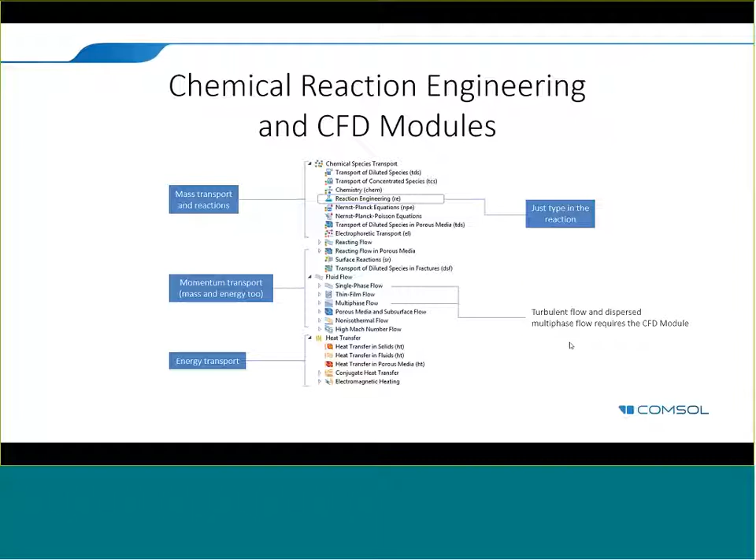In the heat transfer interfaces, which are the energy transport equations, you can combine heat transfer in fluids and also heat transfer in solids. For conjugate heat transfer, if you want to model, for example, a metal heater in combination with fluid flow, you can combine that. Specifically, you can have surface-to-surface radiation, which requires the heat transfer module. But for radiation surface to ambient, that is actually included in the reaction engineering module and in the CFD module.

So if we go back to our flowchart and look at the space-independent models, typically this would be a model of a lab-scale reactor where you have full control of mixing, so you know you have a perfectly mixed system. The only variations you have are in time, so you might have composition and temperature variations in time, but the distribution of temperature and composition is fairly uniform in space.

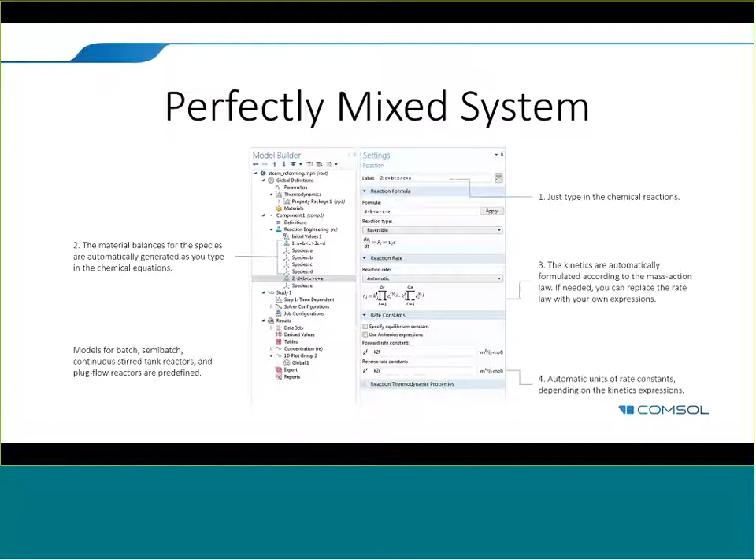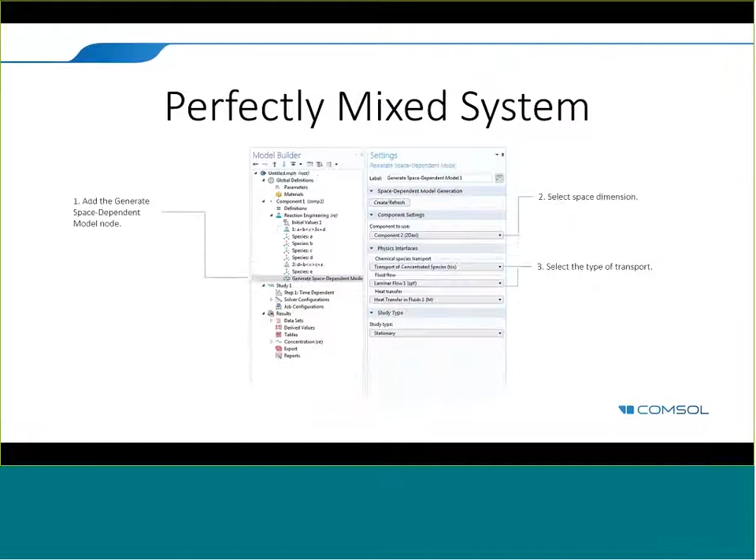For that type of model setup, we have in COMSOL the reaction engineering interface, where you just type in the chemical equations, and the material and energy balances are automatically defined and set up under the hood. Then, to go to the next step in the chart to model a space-dependent model, you have a generate space-dependent model node, where you can select to set up a model in 1D, 2D, 2D axisymmetric, and 3D with chemical species transport, fluid flow, and heat transfer. I'm going to quickly show you how that looks in the graphical user interface.

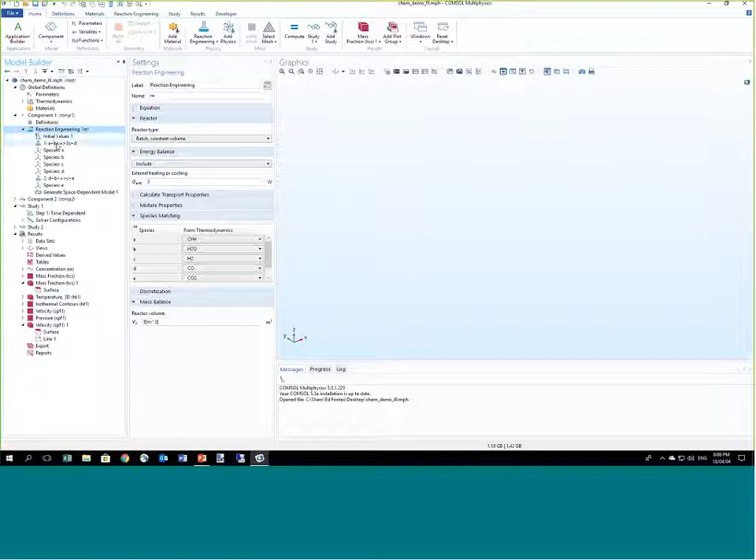So typically you could start with a reaction engineering interface, and in the reaction engineering interface you can add reactions by just clicking the reaction button. Once you click that, you can just type in the chemical equation right in the user interface. You can also type in chemical formulas like CH4, or use a generic form like A plus B gives 3C plus D, like in this example.

The rate expressions are automatically defined here, set up using the mass action law. But you can manually change this completely. For example, if you want to remove the reverse reaction, you can just select the reverse expression and just have the forward reaction rate.

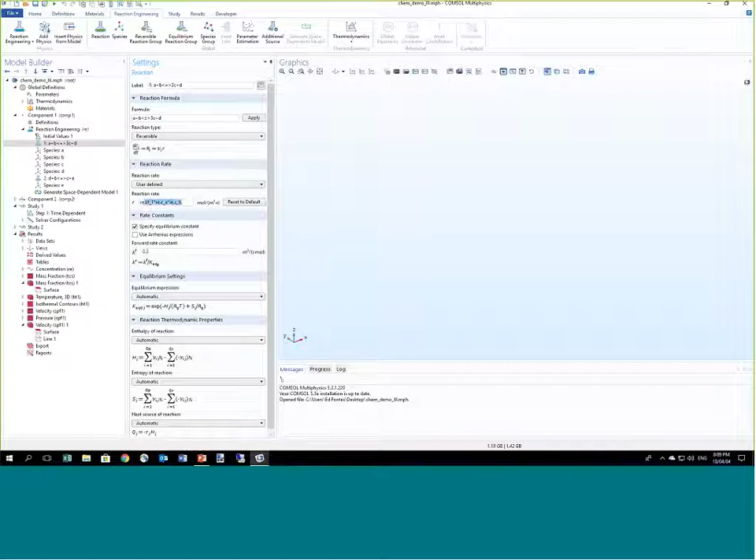You can add a second reaction like in this case, and you can also generate a space-dependent model by clicking this button. In this case, I have generated a 2D axisymmetric model of a tubular reactor. Once I click create the space-dependent model, the transport of concentrated species, laminar flow, and heat transfer in fluids interfaces are set up here automatically.

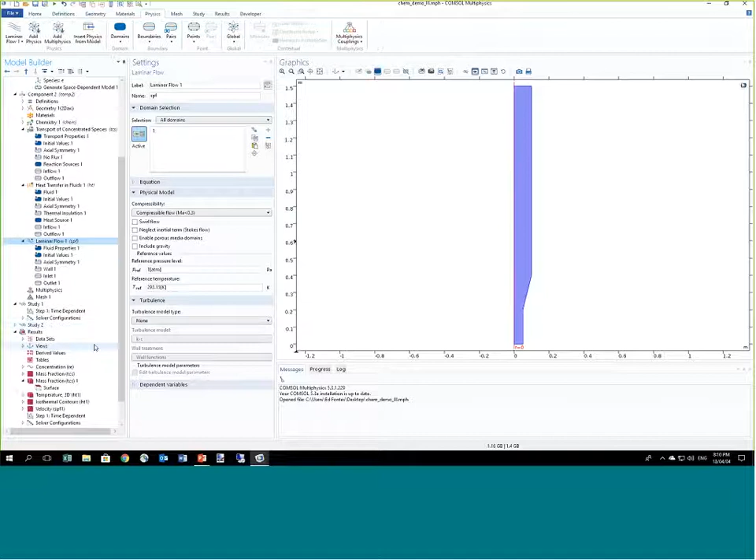Of course, I have to draw a geometry. Once I solve the problem, for example the time-dependent problem for the 0D case, then the stationary problem for the 2D axisymmetric model, I can get the composition, the velocity field, and so on in this very simple and straightforward tubular reactor.

So using that strategy, you can very easily set up any type of model, including for non-ideal reactors, with both very complex chemical kinetics and also very complex transport processes.

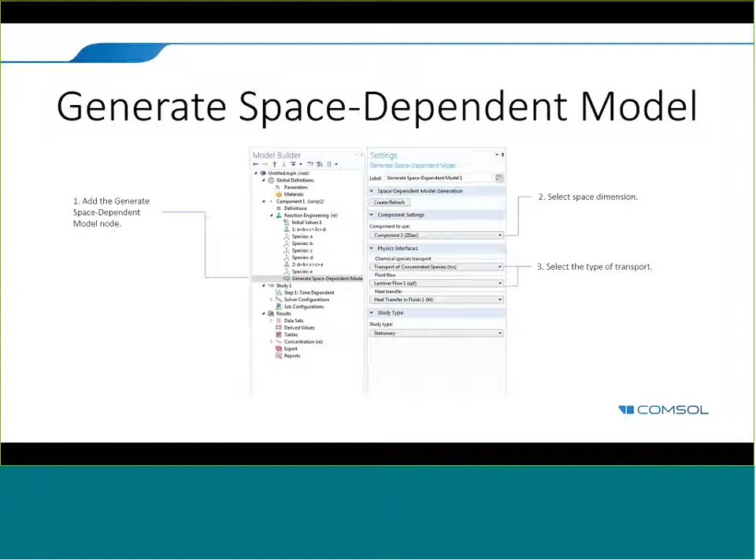One thing that I didn't show you here is that since this latest version, we also have a thermodynamic property database in COMSOL in order to generate properties for liquids and gases such as heat capacity, thermal conductivity, binary diffusivities on mixture, and also to compute things like the composition of gases and liquids at equilibrium, so-called flash calculations. Density, viscosity, of course, and those properties that can be very hard to compute.

They're actually not difficult, it's just a lot of work to compute. So you have a bunch of different thermodynamic models for liquids and gases, so that you avoid that sheer physical work that is involved in computing thermodynamic properties.

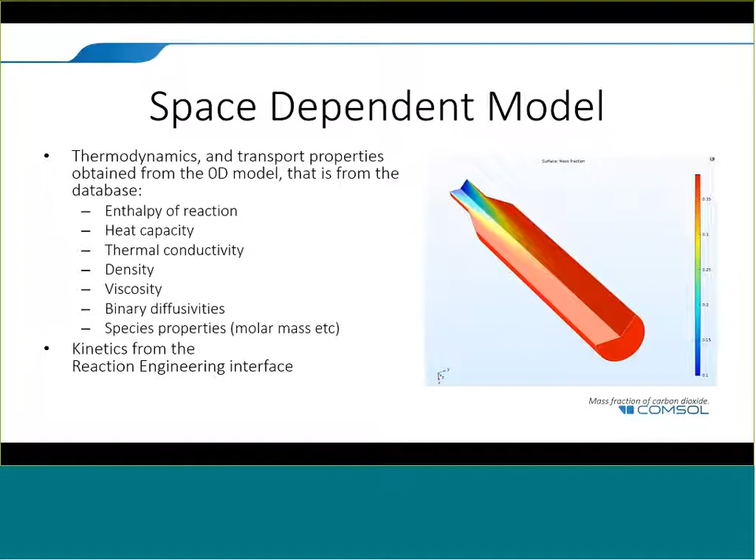So the rest of the presentation will actually be about tank reactors that are continuously stirred. They can be continuous, but they can also be batch reactors. So in this example, a heated reactor, heated with two vertical pipes, with a bottom impeller, with a free surface also, a model using rotating machinery and with a free surface.

In order to set up this type of problem in COMSOL, we have a number of ready-made interfaces, fluid flow interfaces and reacting flow interfaces for rotating machinery. There are several approaches you can use: the frozen rotor approach, and like in this case, the sliding mesh approach.

In the frozen rotor approach, the impeller doesn't really move. You have a velocity at the blade of the impellers, but it's frozen in time. So it's a kind of pseudo steady state approach, which gives you a very good estimate of the flow distribution and the amount of mixing in a system.

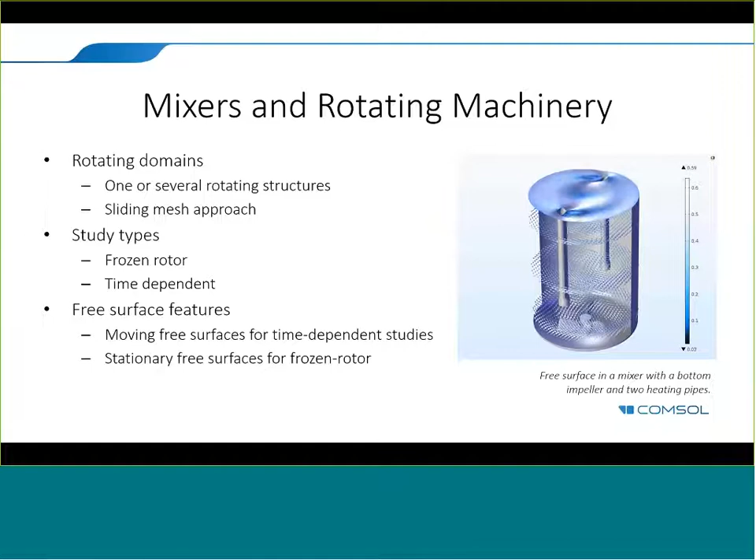And I'll show you this later.

So there are a couple of things you need to do in order to model rotating machinery or mixers, like in this case, or stirred tank reactors, using a moving mesh, a sliding mesh. And that's one of the things you have to start with, is to use assembly conditions for the geometry. What does that mean?

Basically, the core of the fluid, where the impeller is, that surrounds the impeller, has to be a cylinder in COMSOL. On that cylinder you tell COMSOL that it is one part in an assembly, and everything outside of that cylinder is another part of the assembly.

That allows, on the faces between this inner cylinder and the outer fluid outside of that hypothetical cylinder, the mesh over those internal surfaces to not coincide. That means the elements do not have to share faces when you create the mesh. They can actually slide over each other, and the solution will be projected from one side to the other through interpolation.

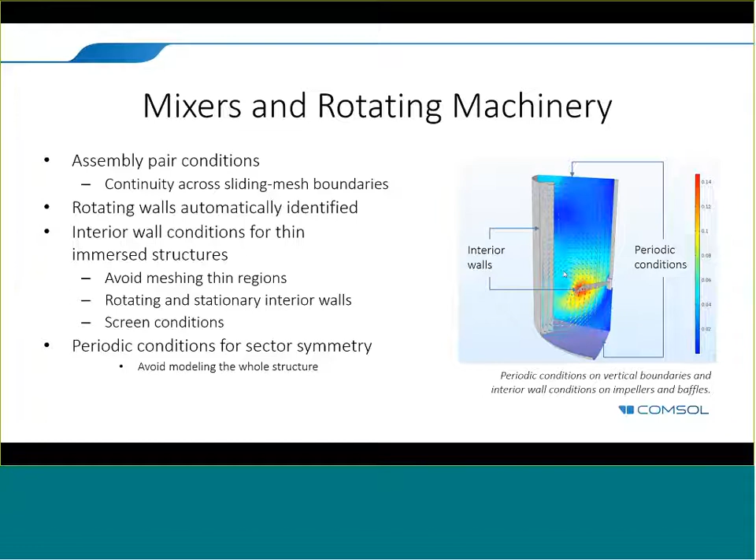And since the impeller here is frozen in time, you just apply a velocity at the surface of the impeller blades. That means you can assume periodicity on the vertical internal boundaries, the symmetry, periodic conditions, where those conditions are applied. That makes it possible to get very good estimates with comparably very small computational effort, since the problem is only one-eighth of the original problem.

So I'll show you a short demo of a mixer here in this case, but showing how you set up a mixer problem, or a batch reactor problem, a tank reactor with a central impeller, and how that is set up in COMSOL for sliding mesh and for a full time-dependent computation.

So let's start with the first step. What we need to define in definitions, this is actually new for version 5.3a, is that in definitions you have a component, a three-dimensional component. You can see that on the icon, which is a cube.

If it's a two-dimensional model, it's just a square. Now, in the definitions, we have now centralized all the moving mesh. That means that whatever physics interface you add to this model, it will obey the moving mesh. It will actually be able to generate the equations for a moving mesh.

So if I had manually added heat transfer and chemical species balances and so on, they would all automatically get the rotating domain. In the past, you had to tell each physics interface where the rotating domain was. Now it's all centralized, so it makes it possible to set up a multiphysics problem with one moving mesh feature, which is the one in the definitions.

So here, the only thing I need to do is tell COMSOL which one is the rotating domain. Now, the rotating domain here in blue is one of the two parts in the assembly, and the other part of the assembly is what's outside of the rotating domain, shown here in red.

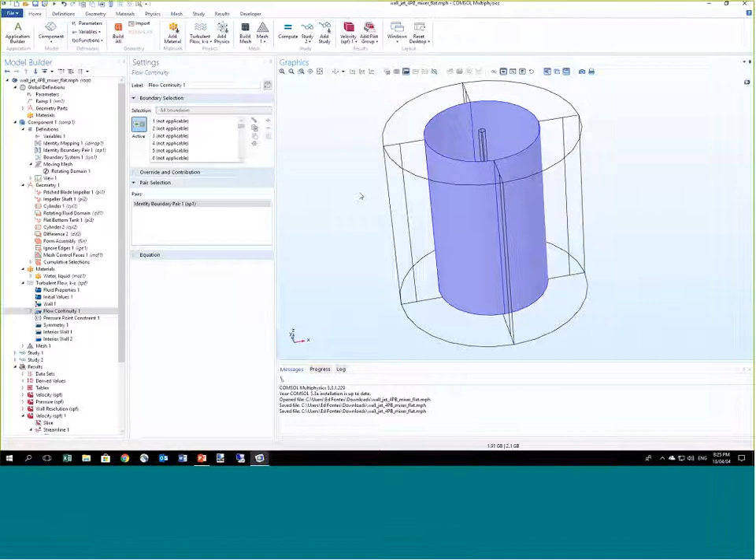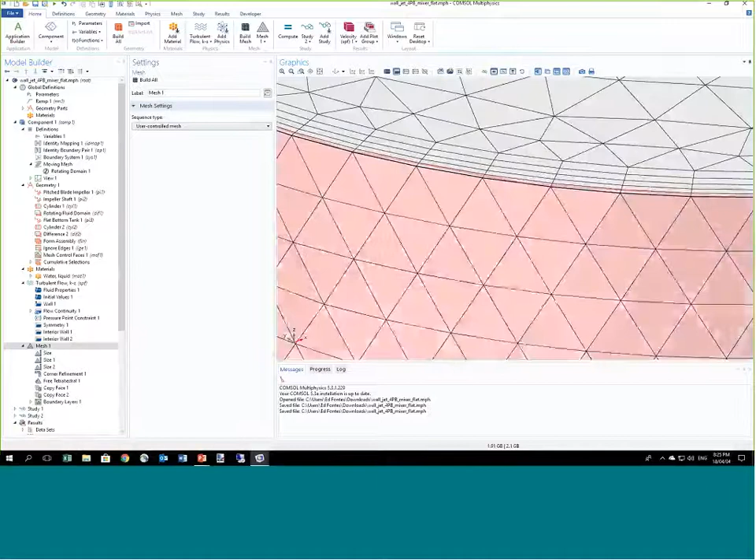The mesh is then automatically generated, and if you look closely, since it's a fluid flow and transport problem, it will automatically use a so-called boundary layer mesh, so that it will resolve the flow at the walls a little bit better. And once we solve the problem, we get the fluid flow, and we can also generate an animation from this. No, it didn't take that much, so we can repeat that.

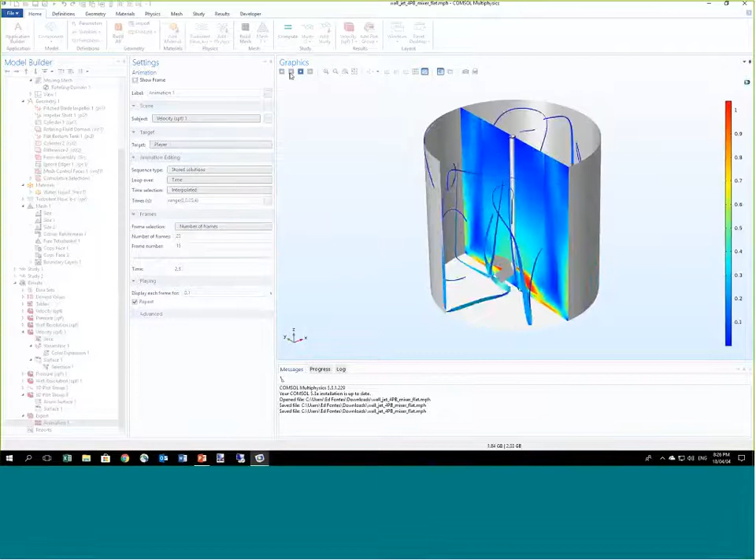And so here we see the impellers. I should have had more time steps here to really see the rotation of the impellers. And here you can see qualitatively how the fluid flow distribution looks. This impeller actually works like it should. It's a so-called axial impeller. So by its angle, it should generate an upwards and downwards rotating flow to obtain optimal mixing.

This is actually a benchmark model. It reproduces the fluid flow reported in a paper in the scientific literature, and is used to verify that we're actually solving the equations correctly here. In this case, we're using the standard k-epsilon model for solving this type of problem in COMSOL. So it's the k-epsilon model for rotating machinery that is used here by default.

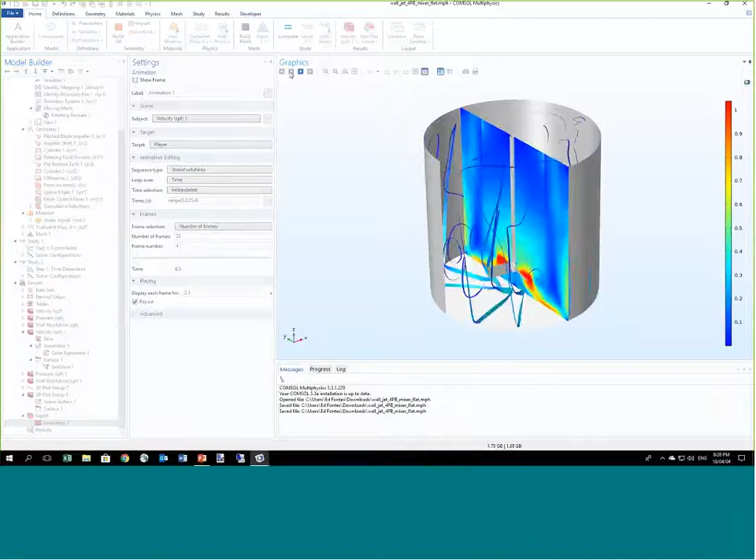So another thing that I want to mention is that now we saw here the time-dependent flow, and if we look closely, it already started with some kind of developed flow. We didn't have to wait until the flow was developed, and the reason for that is that we combined two studies. In the first study, we solved for a frozen rotor, so that the impeller in the middle doesn't really move. We just apply a velocity on the blades. Well, COMSOL does. We don't have to bother about it. We just select the static frozen rotor, and everything is done automatically for us.

But what that gives you is a very good initial condition if you're interested in the harmonic steady state. It's not a real steady state, but a harmonic steady state that you obtain once the impeller actually rotates. So you get a very nice initial condition for the full time-dependent simulation here that goes over 4 seconds. You will not see how the mixer or the reactor behaves at startup, but you will definitely see how the mixer behaves once it has reached the operational speed.

And so you see the amount of mixing, the concentration distribution that you could expect when you have reached the best possible mixing with this system. And so you will be able to see if you get uniform product quality or not. In this case, I guess the mixing is actually not very good. So what you would probably have to do is insert another impeller a little bit up on the shaft, maybe in the middle, with some shift in the position, in order to get improved mixing at the top of the mixer or the reactor in this case.

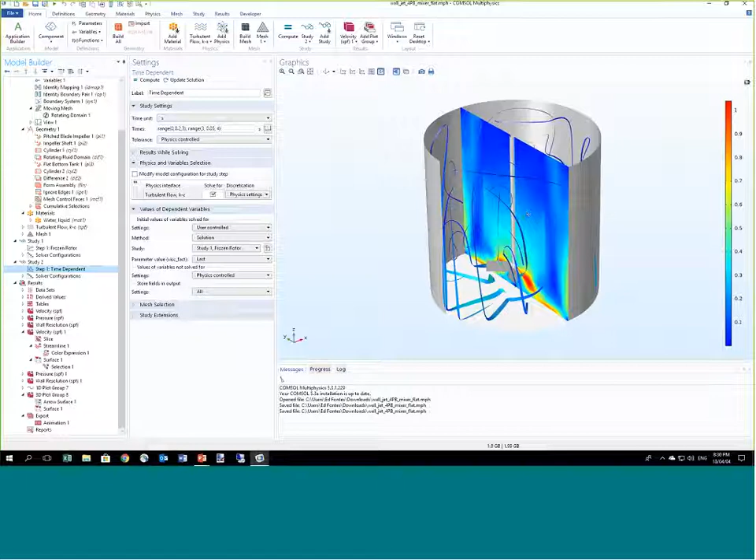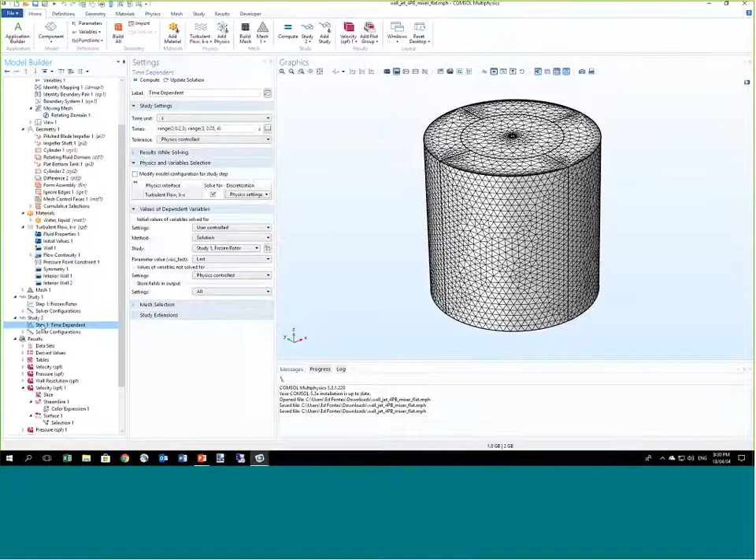So to repeat again, first the geometry with form assembly. Form assembly separates the inner cylinder from the outer stationary part of the mixer. Secondly, define which part is the rotating domain, and then tell COMSOL that you have continuity over these boundaries between the inner and outer domain. Set up the mesh, set up an initial solution with the frozen rotor, and then use that as an input to the time-dependent solver for the fully time-dependent solution of the problem.

And then plot the solution, of course, and a movie doesn't say that much. It's just nice to see, and maybe some qualitative results and understanding you can get out of the movie. But eventually, what you do is you plot XY plots comparing some entity like the velocity norm along, for example, in this case, the radius, and the viscosity, and you compare to experimental data and data reported by other people that have solved the same problem.

So what are the typical customers that we have for this type of problem? The typical customers for batch reactors and stirred tank reactors are fine chemicals, pharmaceutical, consumer products such as soaps, shampoos, and toothpaste. Food processing is also an industry where you find this type of batch reactors or tank reactors that can be continuous.

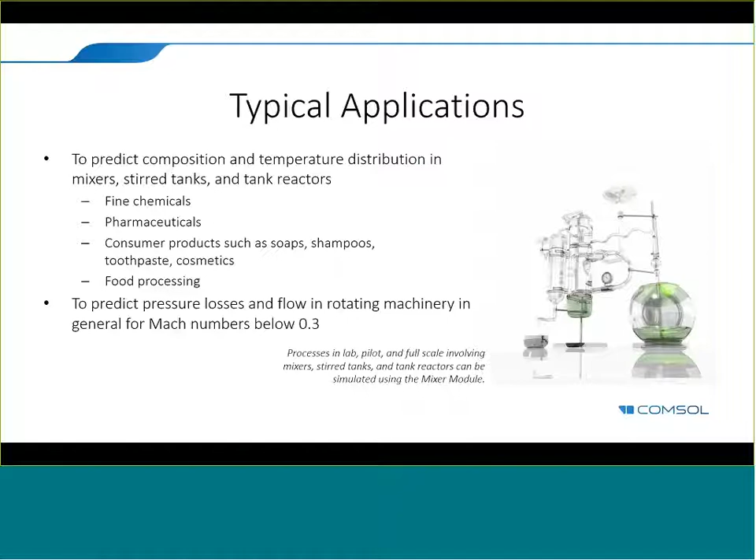And I already hinted that you have laminar and turbulent flows for rotating machinery. We have a bunch of different turbulence models, like algebraic turbulence models, transport equation turbulence models, and then ready-made functionality to deal with these rotating machineries. In the Mixer Module, we have a part library that I will show you also. And then we have so-called ready-made couplings for non-isothermal flows, reacting flows, and multiphase flows. So you can, right off the bat, set up a problem with rotating impellers and multiphase flow.

And then you have all the other multiphysics capabilities. For example, you can couple the model that you see here to the left with a structural mechanics computation to see the loads and the stresses and strains that you obtain on the impellers, and maybe also the deformations on the impeller blades, and also compute the torque that will be required to drive these impellers.

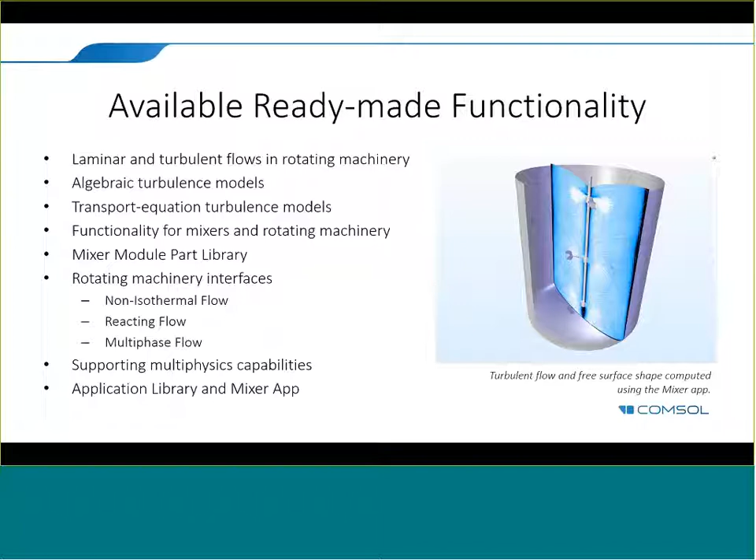And there are a bunch of application library examples and so-called apps. The one that I demoed is in the application library. So you can download this example and run the step-by-step instructions to set up and reproduce the results that I showed you.

If you look at the laminar flow capabilities, we have Newtonian and non-Newtonian fluids, and we use the Carreau-Yasuda model. But you can also type in any expression of the shear stress for your non-Newtonian models. We're also developing viscoelastic flow models for the next release. There's an example already now in the application library, but we will develop ready-made fluid flow interfaces for that.

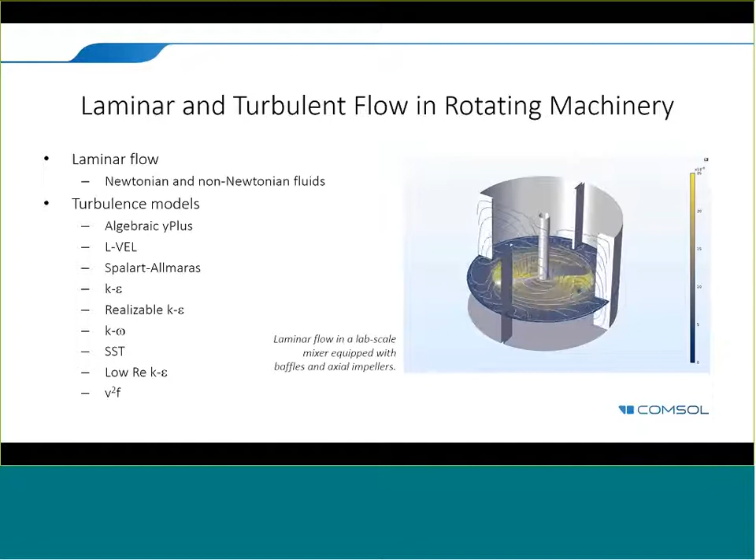The turbulence models, like I mentioned, algebraic models, and then transport models like Spalart-Allmaras, k-epsilon, realizable k-epsilon, k-omega, etc. And I will walk you through those very quickly. So the algebraic models, like the y-plus and the LVEL, are very inexpensive computationally.

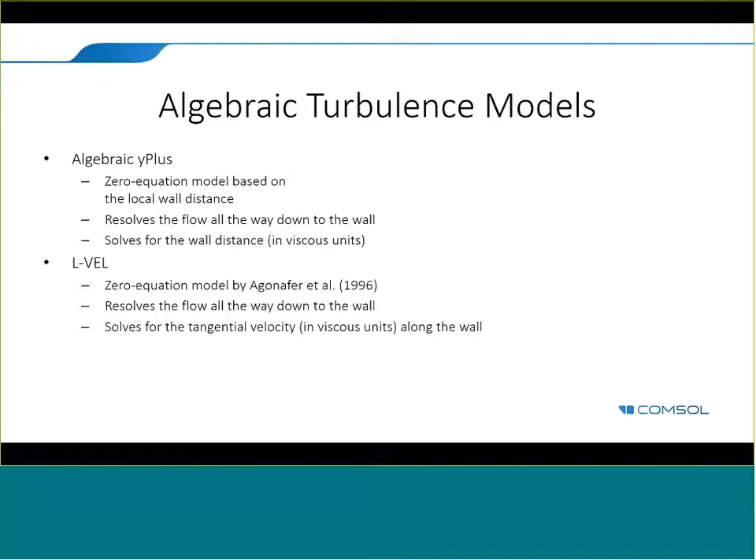They actually don't solve any transport equations for turbulence, and that's also the drawback. They're not very accurate for problems where the transported turbulence has a big impact. But those are models that are very popular when you have fluid flow and heat transfer, and you want to have a good estimate of the energy consumption of a system, for example, and the temperature, and have a graph of the temperature distribution for quality control, etc. And these are used a lot, for example, in electronics cooling, but also for mixers coupled to heat transfer.

Then you have the workhorse, which is the K-epsilon model, and the reason why it's the workhorse is that it gives you relatively good accuracy for a relatively small computational cost. And so the one included in COMSOL also has realizability constraints, which increases accuracy. So it limits the amount of turbulence that can be generated in one point. There's also a more complex realizable K-epsilon model, which models the realizability in the coefficients. So that's slightly more computationally expensive and also slightly more accurate.

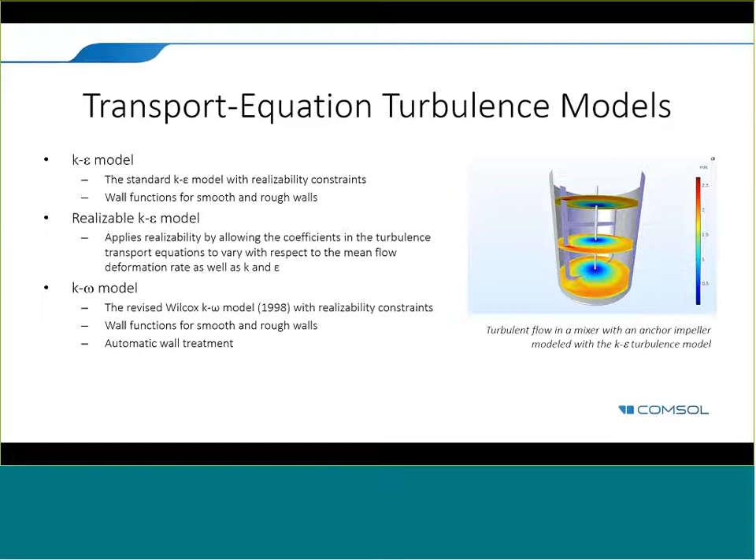The K-omega model implemented in COMSOL is the revised Wilcox K-omega, and it uses wall functions for smooth and rough walls, but it also has automatic wall treatment, which means that if you have a boundary layer mesh, like I showed you, that resolves the boundary layer close enough, then it will automatically use a low Reynolds turbulence model that goes all the way down to the wall. Needless to say, that's more computationally expensive, but if you have the required mesh resolution, it's also more accurate, of course. SST is a combination of K-epsilon and K-omega. So it takes the best of both worlds, close to the wall and far away from the wall.

The low Reynolds K-epsilon turbulence model requires, of course, a mesh resolution, because it always solves the problem all the way down to the wall. And it doesn't assume a boundary layer where you set the conditions outside of the boundary layer. It goes all the way to where the velocity is zero.

The V2F turbulence model is a more complex and also more expensive model. What it does is actually treat the anisotropy of turbulence. So close to the wall, you get a different turbulence parallel to the wall compared to the direction perpendicular to the wall. And that is very common for curved surfaces. In that case, the V2F turbulence model, which is a 4-equation model, so basically K and epsilon and two more equations to model the anisotropy, is more expensive, but of course very accurate.

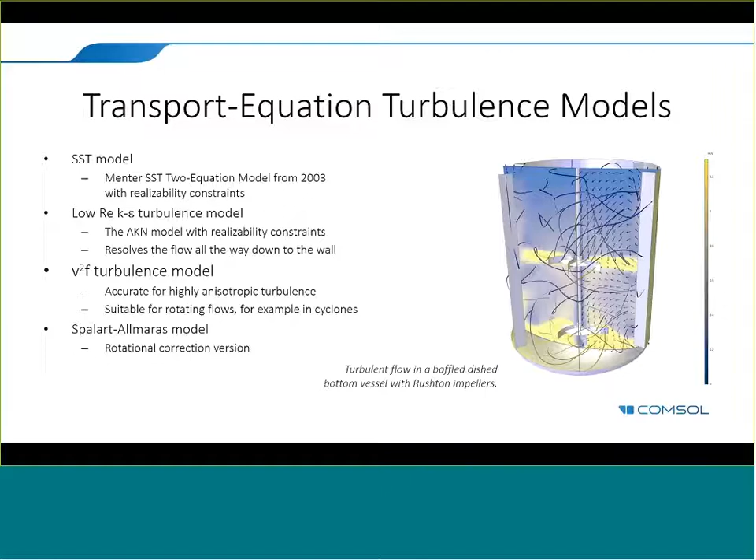Spalart-Allmaras is used for aerodynamics. So if you have turbulent flow, for example, in gases with impellers that look more like propellers or ventilators, then that's probably a decent and relatively inexpensive model to use. It's a 1-equation model. It's a low Reynolds model, so you have to go all the way to the wall. In that sense it's somewhat expensive, but other than that, it's relatively inexpensive, I would say.

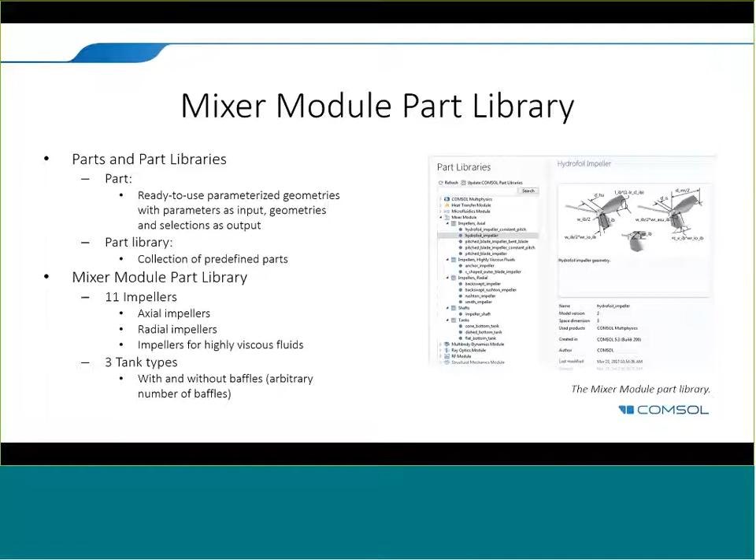Now, in the Mixer Module, you can set up a huge number of combinations of different impellers. There are axial impellers and radial impellers, and then some high viscous fluid impellers; both the axial and the radial impellers can be generated in many different combinations. So there are 11 impellers, but you can create everything from a propeller to an impeller using the fact that you can create fillets and chamfers, and you can also fold the impeller surfaces along a line by just telling the part library where you want to fold. So you can create these types of impellers.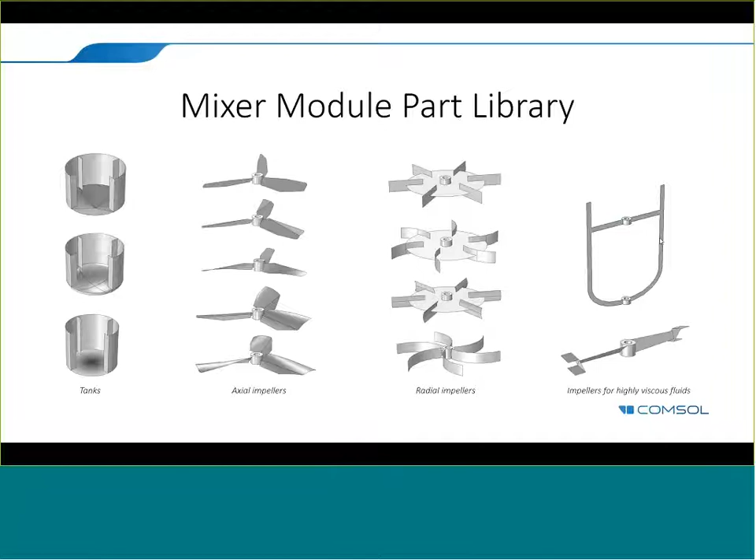For one axial impeller, you can create a huge number of different types. These are just a few. And then the radial impellers, of course, needless to say. The two impellers for highly viscous fluids are those. This is a standard impeller, an anchor impeller, and this is a typical impeller that you would use, for example, to mix paints and very highly viscous fluids. These types of impellers could also be used in the food processing industry.

And so using the Mixer Module, you have three basic parts: the impellers, the shaft, and the tanks. Different types of tanks with cone-shaped bottoms, with dish-formed bottoms, or you can also have just a flat bottom. And you can combine those by just loading these geometries from the geometry part library. You don't have to build them.

They're fully parameterized, so you can vary radius, length, and of course height and thickness of parts and so on. And you can also vary radius of fillets, position of chamfers, and position of folds. Like here, for example, you have a fold. That fold can be positioned wherever you want on the impeller itself.

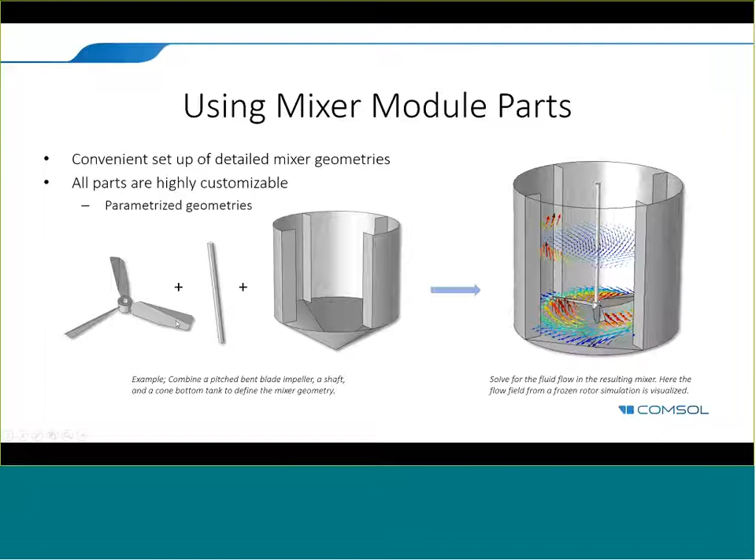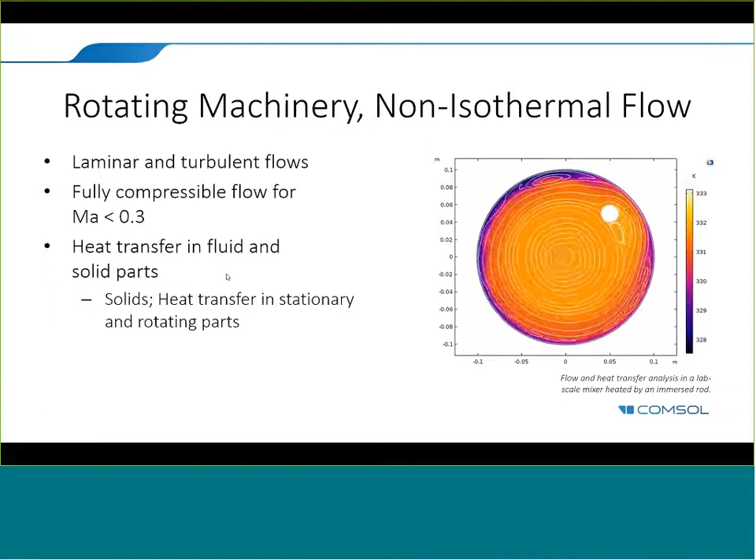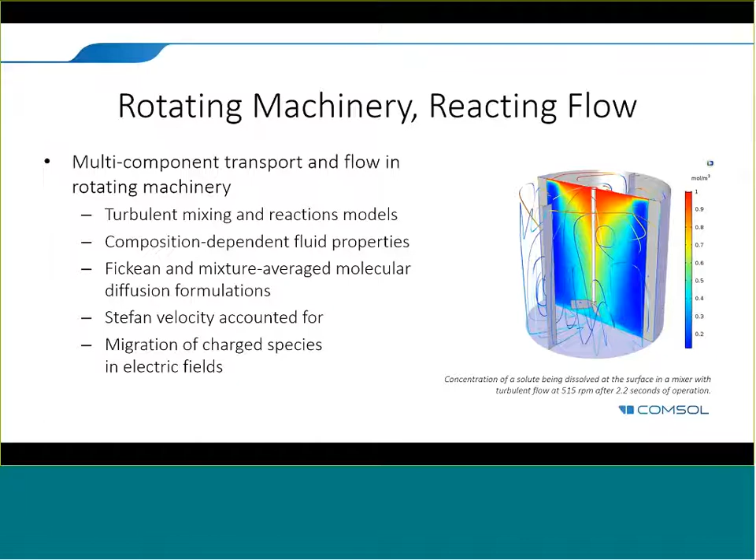And there are ready-made interfaces for reacting flow, both for laminar and turbulent multicomponent transport. For laminar, you can use very accurate models like the Maxwell-Stefan multicomponent transport models, and you can use the mixture-averaged model or just pure Fickian models for diluted solutions. And you can also have electrochemical problems with electric fields for migration of charged species, accounted for in the transport of chemical species, fully coupled to fluid flow and chemical reactions.

And since the last version, we also added mixture and bubbly flow as ready-made interfaces for rotating machinery, where you can model solid particles or liquid droplets in a fluid, or gas bubbles in a liquid, for example. And you can, of course, do this for laminar and turbulent flows.

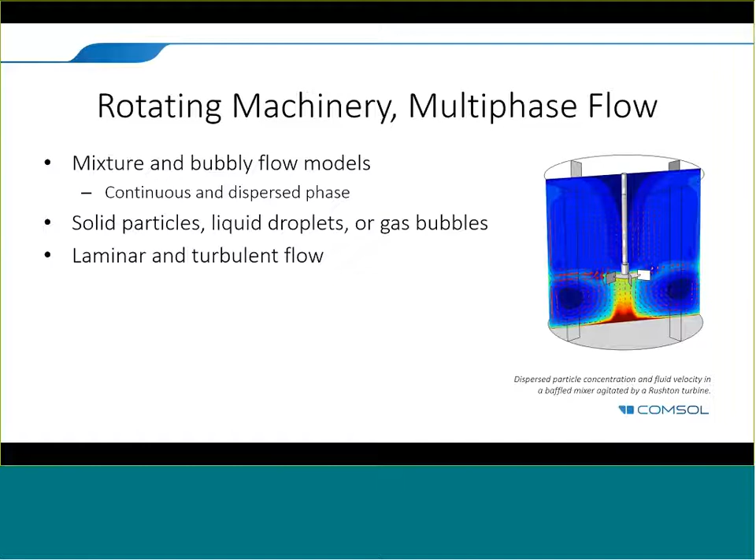I briefly mentioned fluid-structure interaction in order to compute things like torque or stress and strains on the impellers. The conjugate heat transfer I already showed you, and the reaction engineering, of course. That's needless to say. I wouldn't even call it a multiphysics coupling. It's just reacting flow, or just what you expect from a package for chemical engineering and transport phenomena, which is what we have here.

One thing that is nice to have is the Particle Tracing Module, because there you can do very complex multiphase flow using Euler-Lagrange models with two-way coupled two-phase flow, and also charged particles. Of course, you can only use that for a small amount of particles, but it's still a very inexpensive way of modeling two-phase flow.

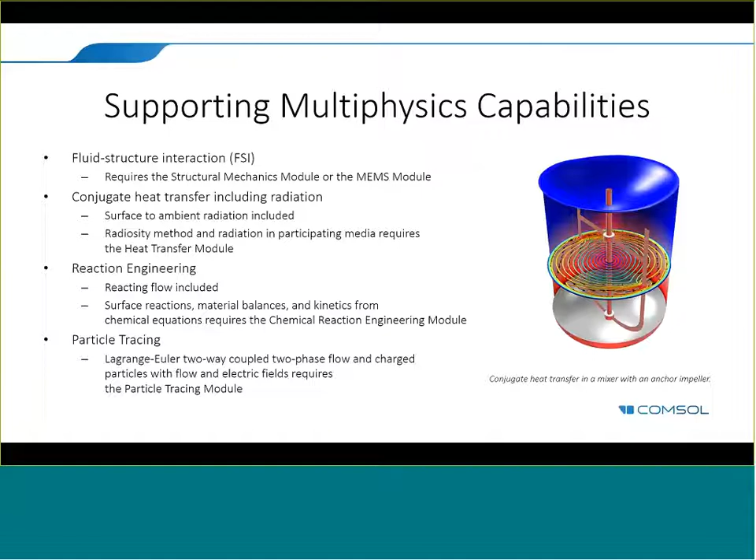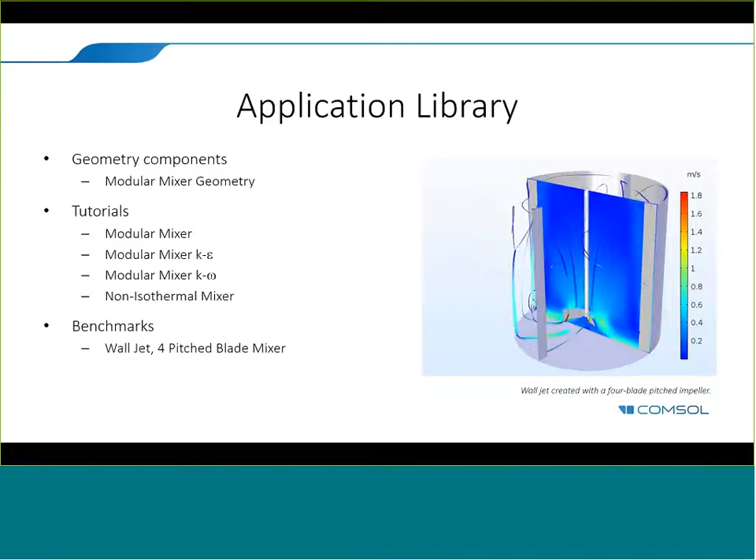And so everything that I showed you here is available for you to reproduce in the Application Library with step-by-step instructions. And the one shown in this movie is actually the four-pitched-blade impeller model that is included in the Application Library.

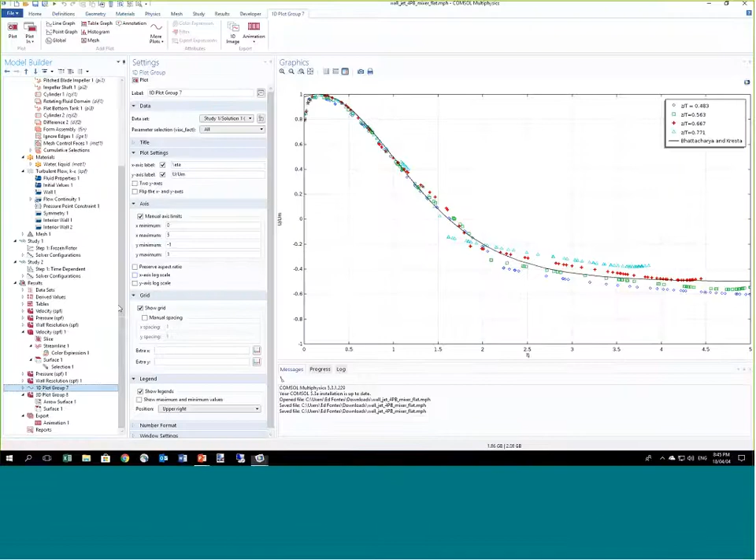There is also in the Mixer Module a very nice little app, which is an example of what you can create. Once you have set up a model like this, which is not very difficult for an expert in the field, like most of you probably are, experts in modeling, then you can create a very simple graphical user interface by using the Application Builder.

The Application Builder basically allows you to drag and drop graphic widgets to create a user interface. You can create a form where you input an impeller diameter, for example, and then you have a button to compute the solution, for example, compute one of the study steps. And then you might want to display one of the results, for example, the velocity field. This allows you to create a very easy-to-use little app. We might want to use a smaller button.

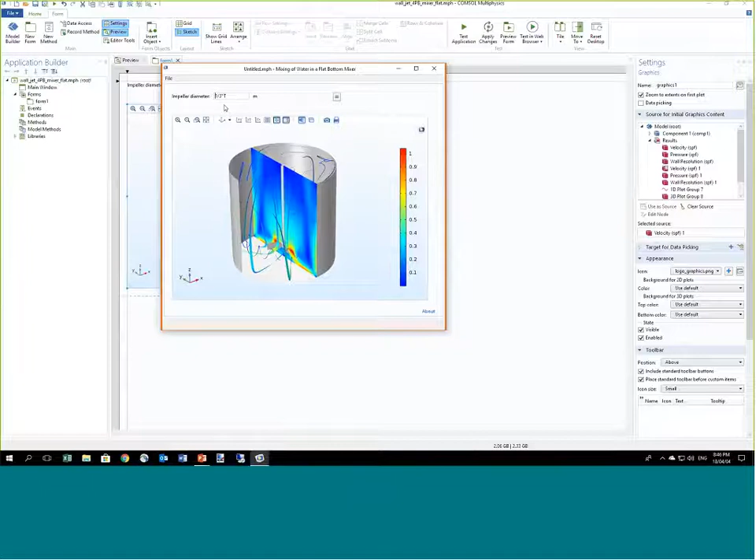And if somebody wants to change the impeller diameter and press compute to solve the problem, then you can generate a very easy-to-use user interface only for that type of problem. So you give the instruction: here you change the impeller diameter, then click compute and then evaluate the result, and that's it.

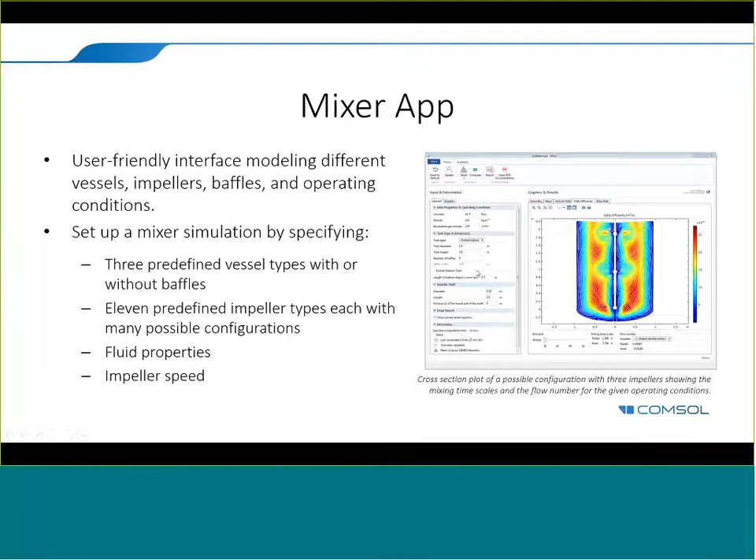This app is, of course, a lot more complex than the little example that I set up in 10 seconds, but it allows you to choose from a huge number of impellers and to position them in whatever way you want inside the dish bottom, flat bottom, and cone bottom tanks that we have. Everything is fully parameterized, and you can select operating conditions and physical properties of the liquid and so on.

Okay, thank you, Ed. Let me just get to a screen. We can stick with that.

So, first question. For optimum mixing, what mesh concept, for example, sliding or fixed mesh concept, is preferred? Or is the selection based upon the characteristics of the fluid medium? Yeah, that's a good question. It more depends on your expectations. So if it is not extremely crucial to get a very high accuracy for product quality, for example, you only need to know the degree of mixing, plus minus 10%, then you might probably get away with frozen rotor.

But if you want a highly accurate model at every time step and in space, then you have to go to the full time-dependent sliding mesh solution. And with that said, once the flow is turbulent, turbulence models are inaccurate in nature. So you cannot expect a very large accuracy for a turbulence model because there are simplifications of the real problem. And so then the probability that you will get away with a frozen rotor model is larger.